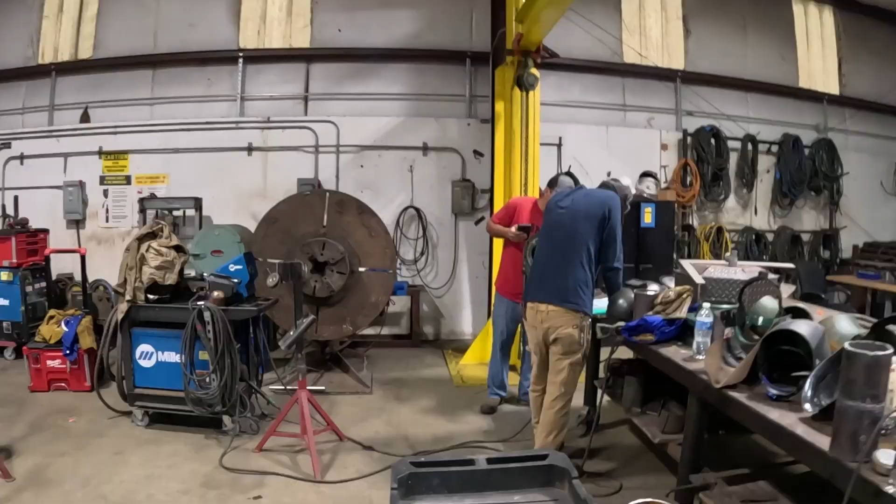These guys not doing nothing. What's up, Ricky? Yeah, we're doing another vlog, Ricky. Come on, yeah, my boy Carlos.

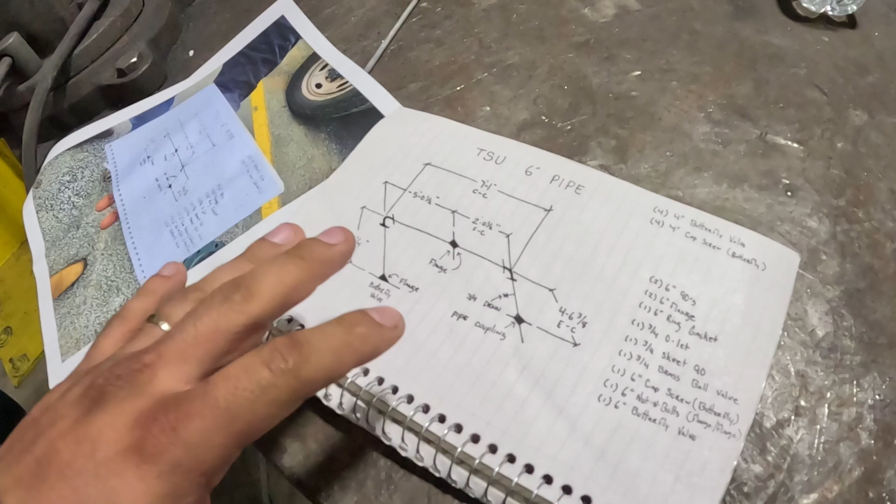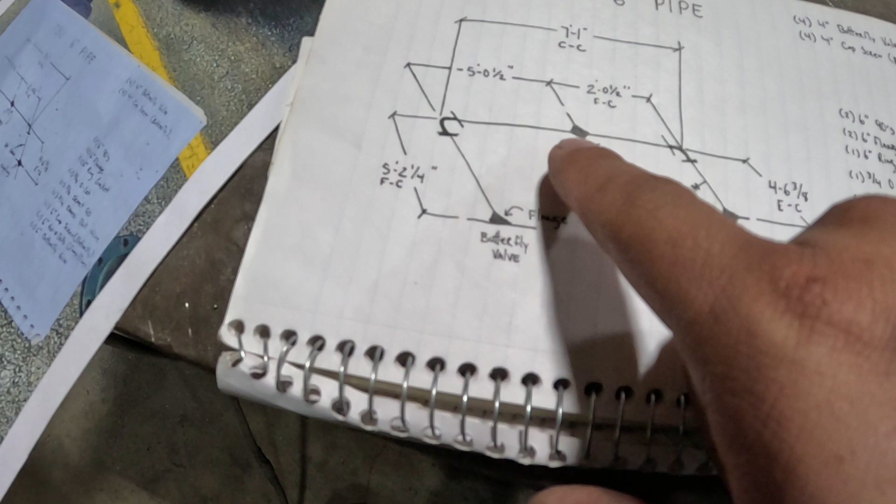This is pretty much what they sent in the email, and I have the original one here. So this is what we got to build, pretty much a loop. We already have this piece right here. Right now all we got to do is add this 90, come down, add a drain, and on this piece, which is a double flange, connect to another 90. This goes to a flange, and then it connects to the pipe we have on the job site. So it's gonna go connected here, connected here.

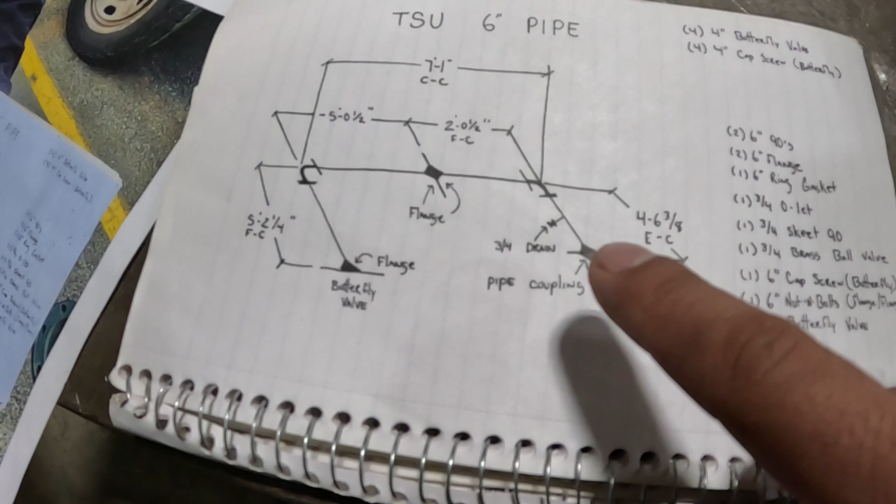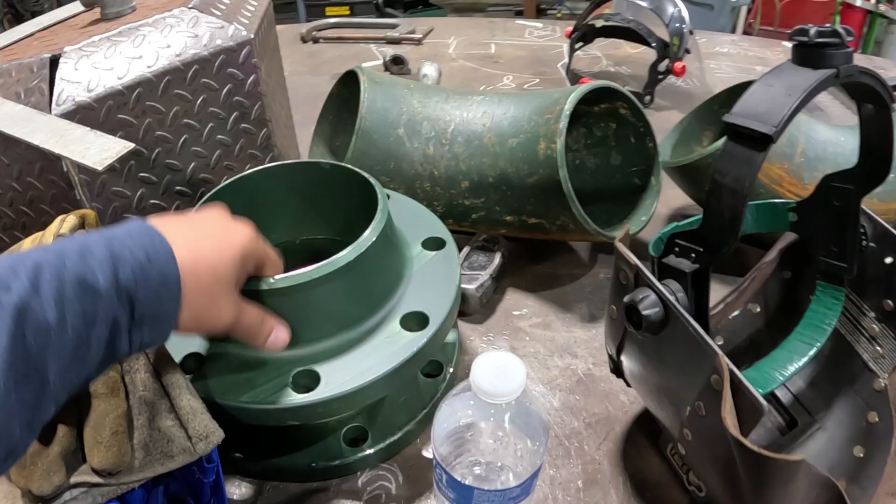So we got some of the flanges here, the flanges and the 90s. We're gonna take a quick inventory of what we have, make sure we have everything, and if we need to, we can order it while we have enough time to get everything here so this can be done today. It has to be done today, because tomorrow morning we shut the whole system down and start building this thing out.

These measurements have to be exact to the point where we're not gonna have any issues, because we're not gonna have a welder out there. In order to fix this, we would have to bring the pipe back to the shop and adjust them where we need to. So when I take these measurements, I have to make sure I have everything correct.

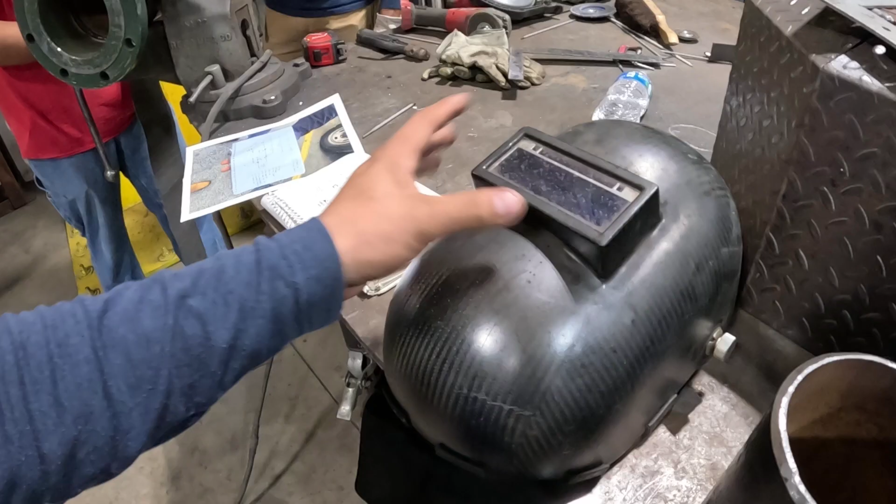What do you think about my carbon fiber hood, Ricky? It's nice, huh? Oh man, you're getting all kinds of scratches on it. I know, man, I'm putting it out there. Sucks. Look at that. It's all right.

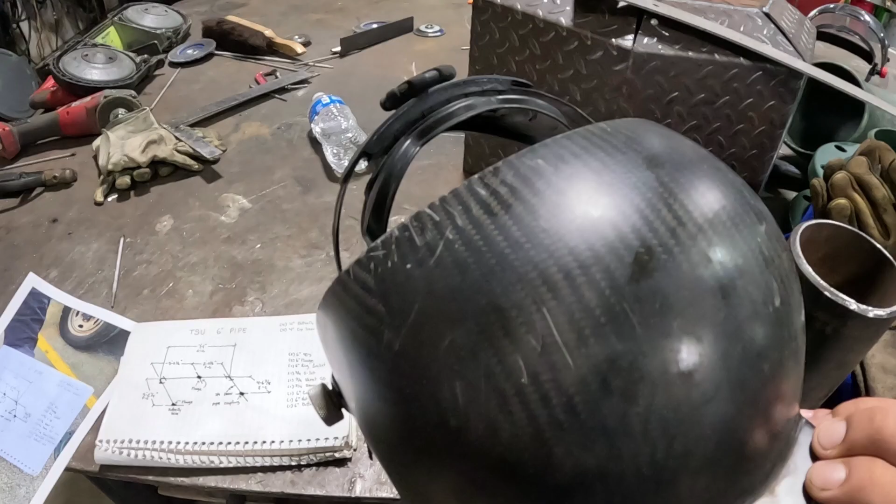Well, look who it is. What's up, man? Welcome back to the vlog. My boy Arnold. All right, what we got today, Marlon?

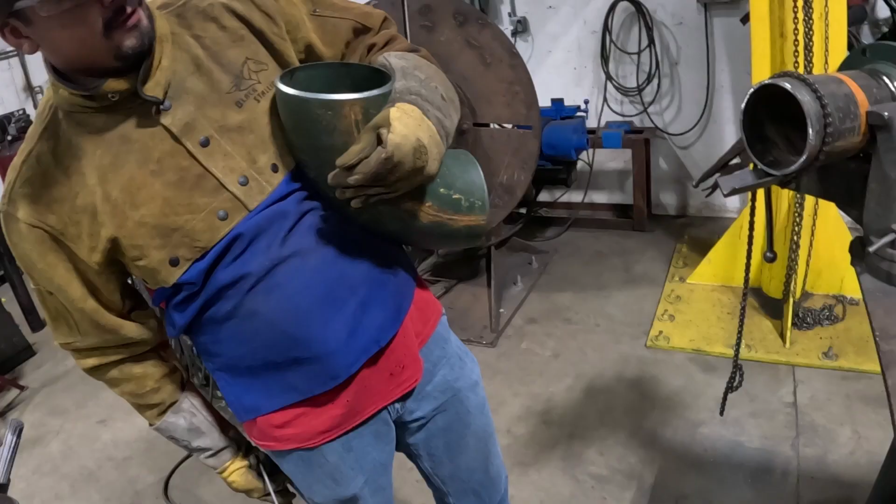Alright, over here, Ricky's being an all-you-can-be soldier, fitting it and welding it out. You want to see the level right there? It's pretty goddamn level. Oh, you got it or what? Let's see this.

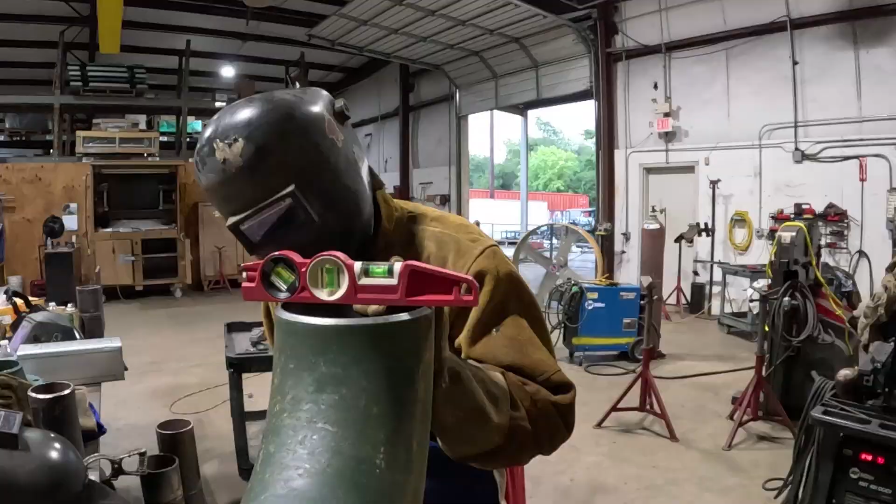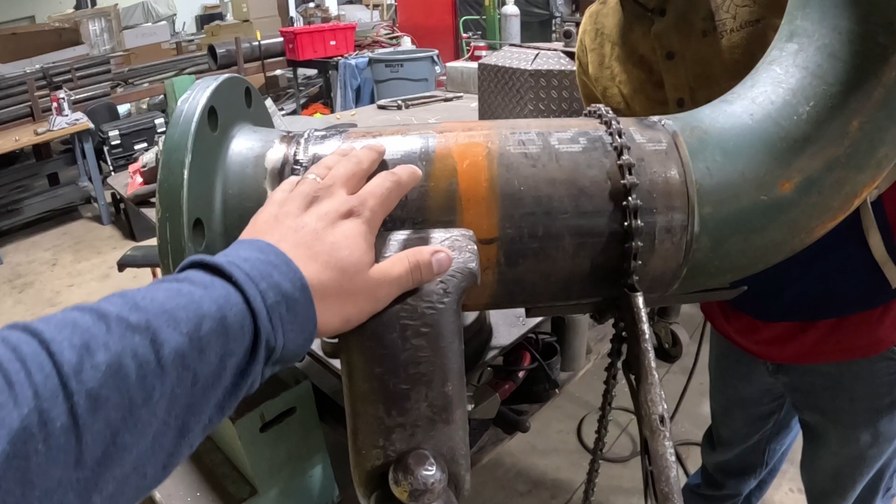It's good right there. Yeah, alright, so Ricky's building out the piece with the flange. We already had this piece made up, so we just went ahead and cut it to size. Ricky's tacking on this 90, and then we're gonna go ahead and go on.

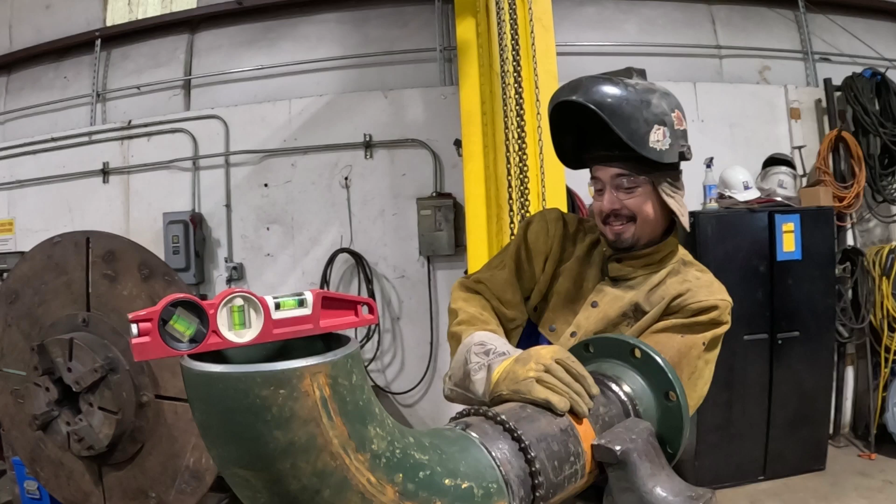I actually get a little break today because Ricky is actually taking care of the welding. I need to take care of the welding. Yeah, in the shop, of course, I take care of the welding. Yeah, he's stepped up. He stepped up. When it's hard, he wants me to do it, but when it's easy over here at the shop, that's when he wants to step up. When it's not my job. Hey, okay, well, we need you tomorrow to put this in. That ain't my job either.

Alright, so we're gonna go ahead, fit everything up, probably weld it out. Like I said, Ricky's gonna help me weld out, so I'm gonna start cutting up the other pipe.

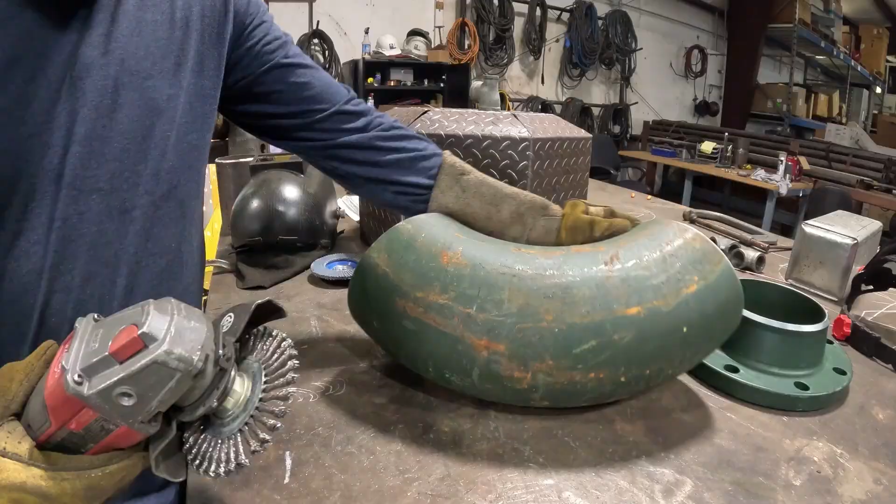Alright, so this guy's over here bragging. This is how you run 7018. Let's check it out.

Okay, let me put some light on it, that way the camera can really pick it up. It's not bad, it's not bad. You've been seeing what I'm doing, huh? Yeah, you've been seeing my technique, huh? I've been saying what not to do.

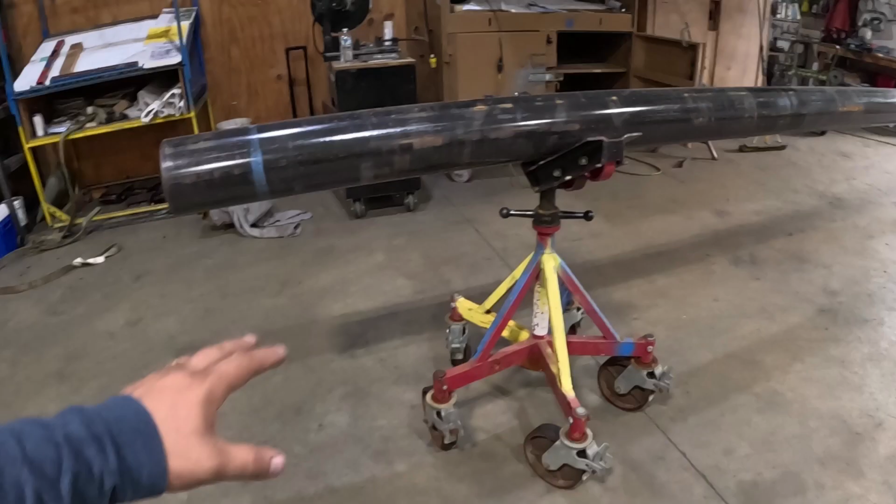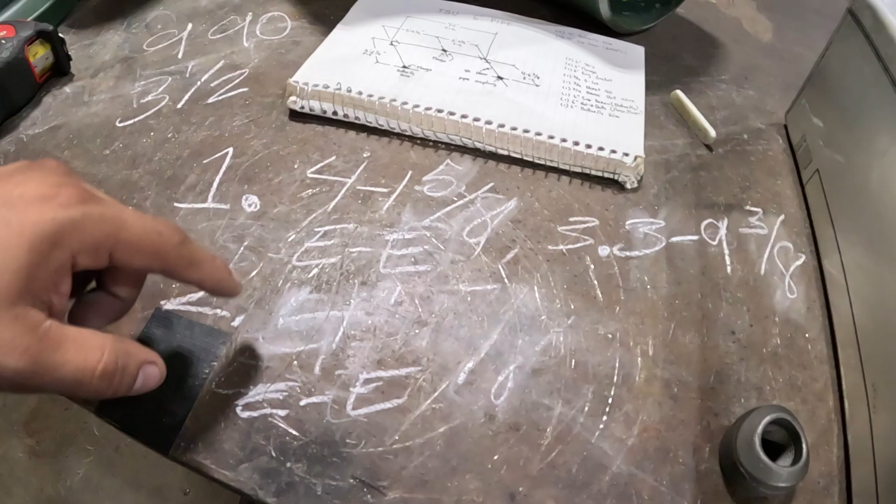Alright, so we finally got the pipe in, guys. So now we're pretty much gonna take our measurements that we have over here. This is our end-to-end pieces, so we still gotta do the takeoff here, which we already did, got them numbered. So we're gonna take these measurements, go ahead and transfer them to this pipe, get this pipe cut to the lengths that we needed. So yeah, let's go ahead and get this pipe cut.

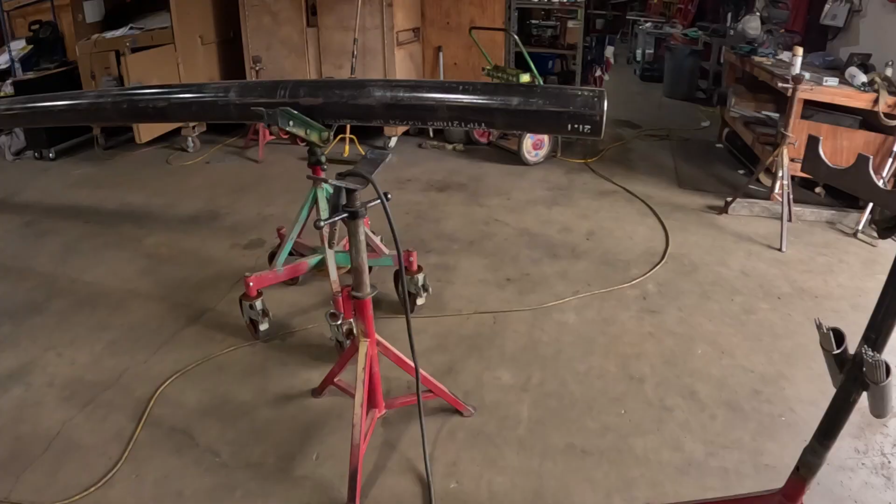That way we can go ahead and start putting it together. A few moments later. Alright, so instead of cutting it, we're gonna go ahead and weld the flanges on the ends of the pipe. So Ricky's gonna go ahead and tack this one up, weld it out, and then we're gonna put another flange on here, tack it up, get it welded out. That way we have pretty much a stand kind of - we're using this whole pipe as a stand. Then once we got those welded out, we'll go ahead and cut it to what we need to. So let's go ahead and fit up the flange, weld it out so we can keep going.

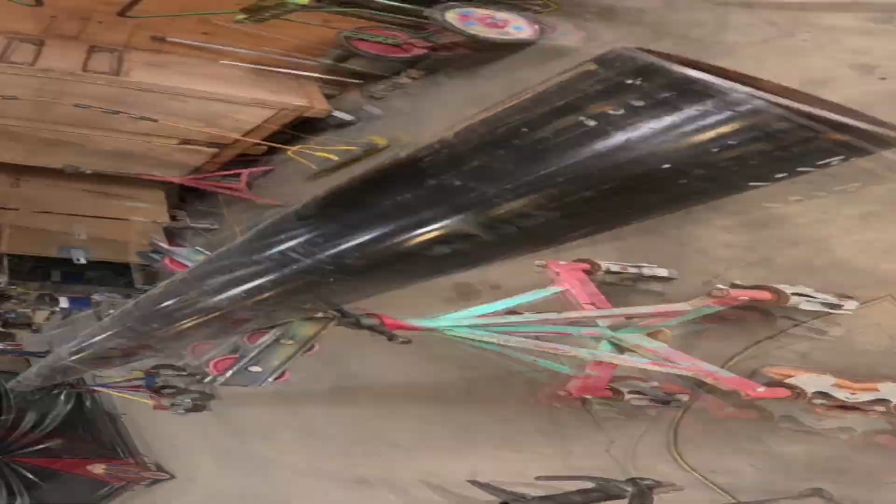Alright, so I just fit up my boy Ricky right here with the flange. He's gonna go ahead and weld that out. Once he gets done with that, we're gonna put another flange over here. He'll go ahead and weld this one out. Once he gets both of those done, we're gonna go ahead and take our measurement, cut it, and then go ahead and start putting our pieces together.

So we're rolling now. Finally that pipe got here, we're able to get some stuff done now. So let's get it.

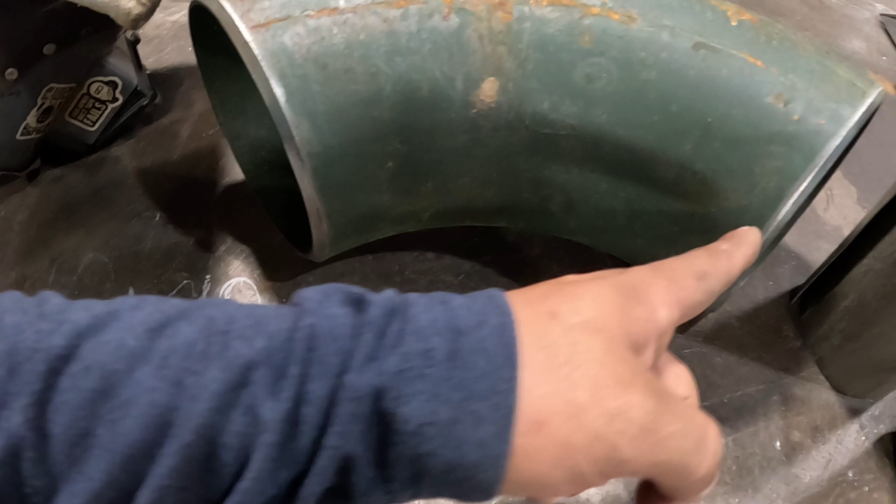Alright guys, so now that flange is welded up, now I gotta go over here to my drawing, and pretty much all these measurements are from the face of this flange, which, like I said, that's a flange, the face of that flange to the center of that 90, which it's right here. But we need to get the measurement to here so we can know exactly what size pipe we need to cut. So what I gotta figure out is find out my takeoff. On a 6-inch 90, it's 9 inches. So from here to here is 9 inches.

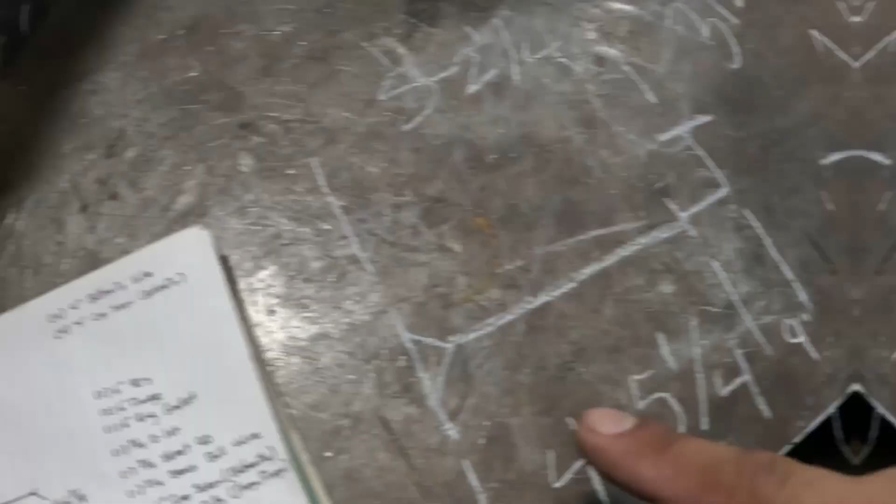Alright, so y'all can better understand me, I pretty much drew out the flange with a piece of pipe in between and then the 90. So my whole total is 5 foot 2 and a quarter from the face of the flange to the center of the 90. So I need to find out what this measurement's gonna be.

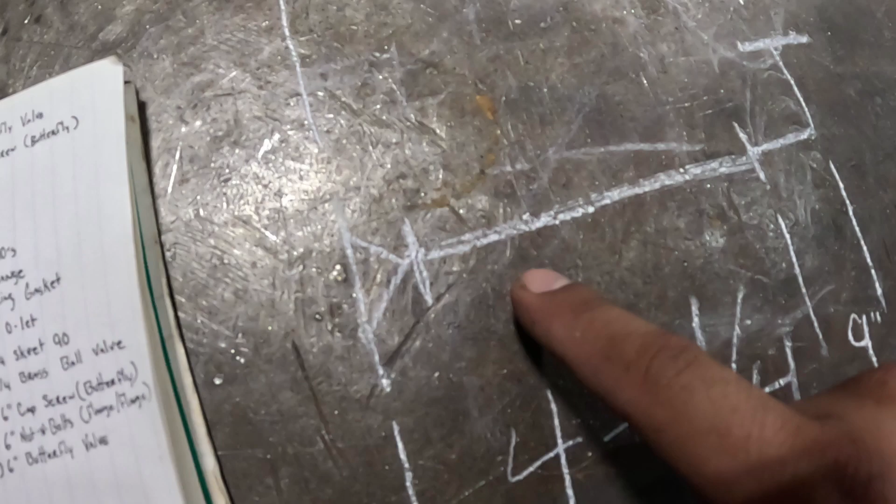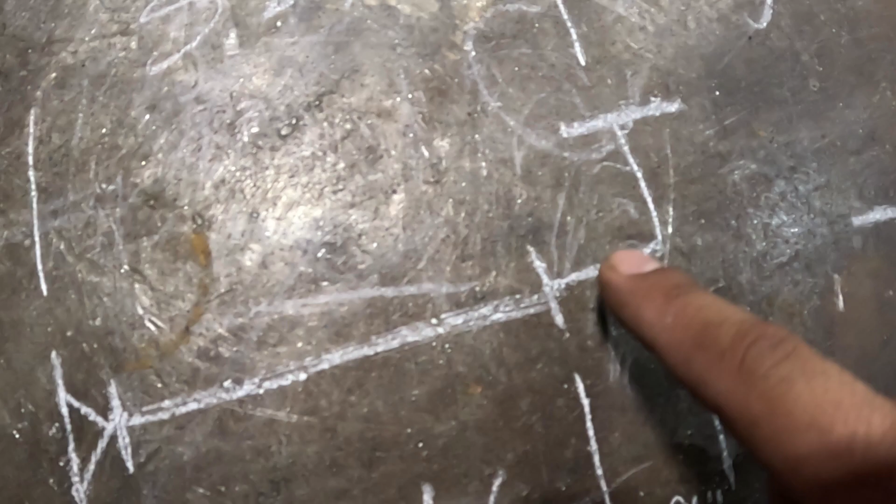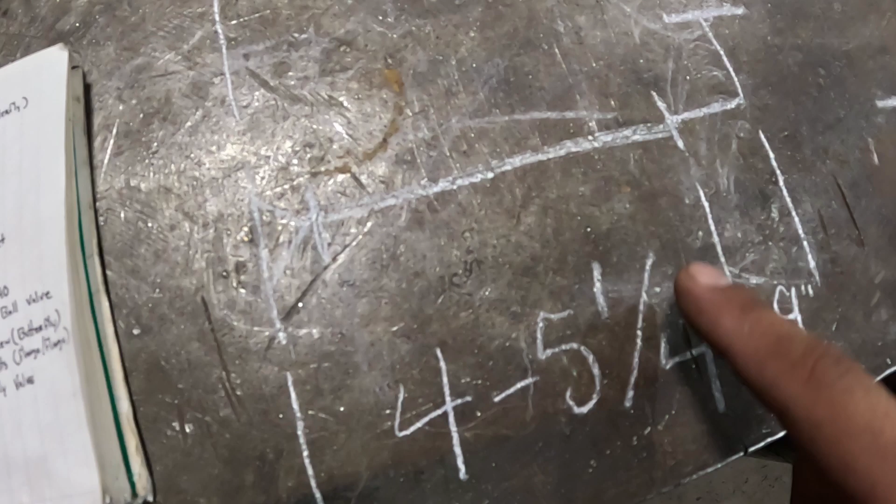But because Ricky already welded the flange on the piece of pipe, now I pretty much have to take off my 90, which my 90 from my edge to center is 9 inches. So that gives me 4 foot 5 and a quarter. So I have to measure from the face to the edge of my pipe. That's gonna be my cut piece. So my cut piece is gonna be 4 foot 5 and a quarter.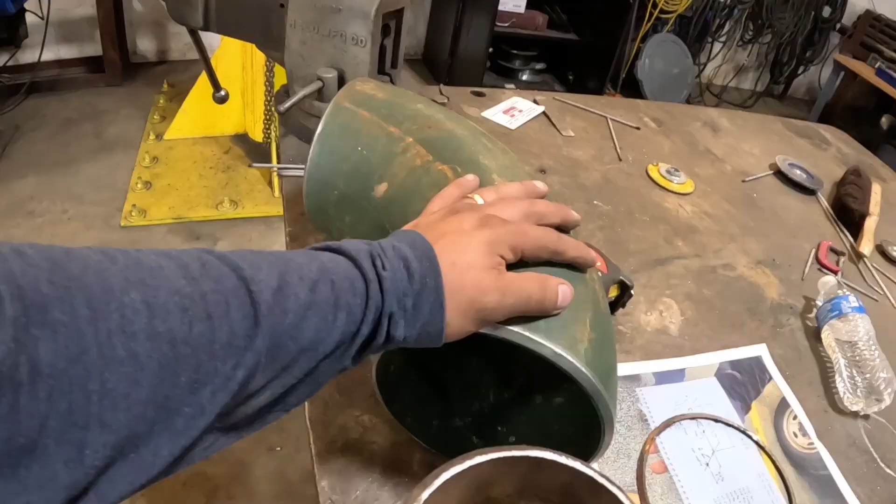All right, so we got that piece cut to the measurement we needed. Now we're gonna get it ready to fit up so we can throw on our 90. We're gonna put this up, weld it out, and then make the next piece. While he's welding that up, I'm gonna start cutting this piece and this piece also, just so we can get this going, guys, because this pipe came in super late and we gotta finish it today.

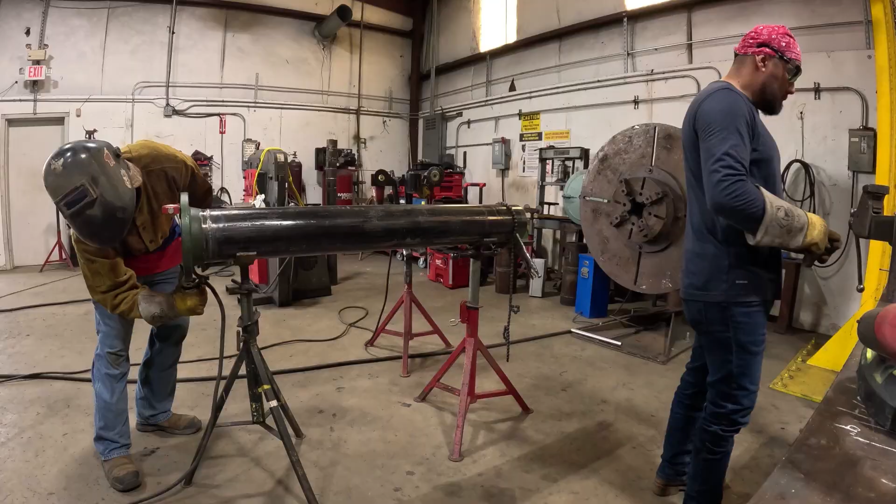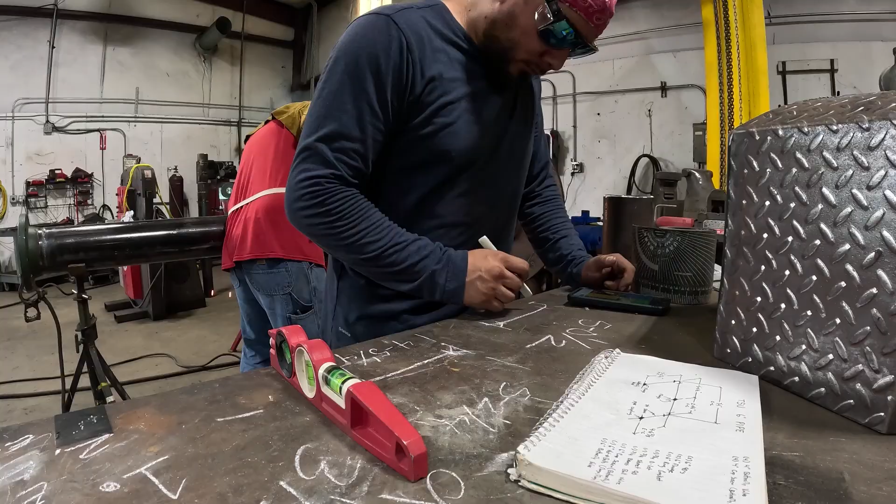All right guys, so Ricky got that one welded out. I got this one cut. I got this one marked. So once we get back from lunch, we're gonna go ahead and get these done.

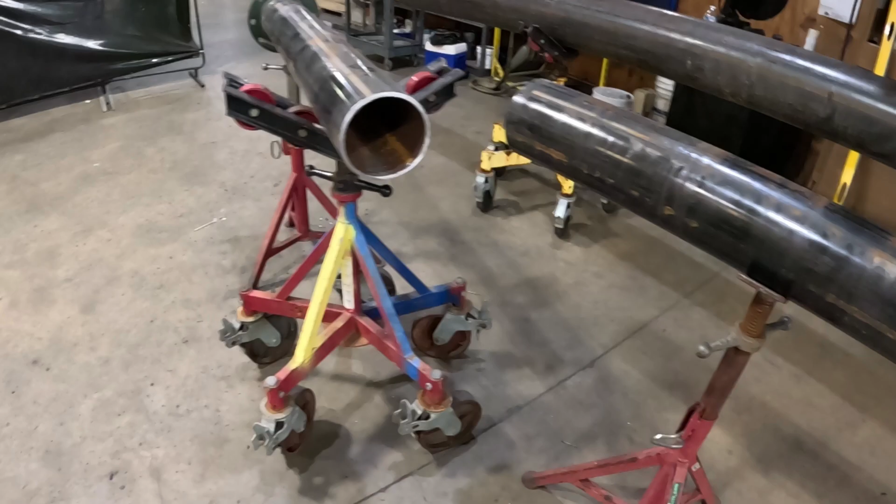Yeah, let's go get something to eat right now. But yeah, it's going pretty good. I have a good feeling we'll get this knocked out. I need to get this knocked out no matter what. So right now, let's go get something to eat, refuel, and we'll come back and hit it strong.

One hour later. What you doing? You ready? Ready to get back on it? This one's done? Yep. All right, I got that other piece. Actually, that one can go on here now.

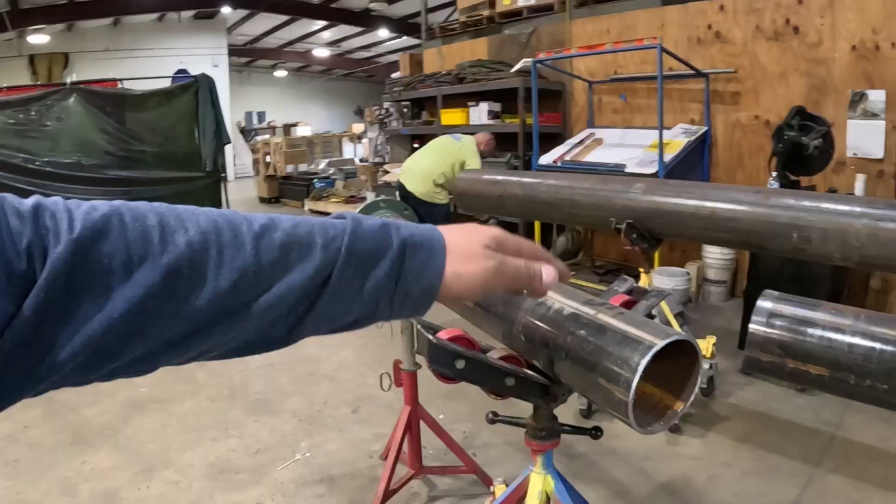All right, so we just got a bite to eat. I got some Chick-fil-A. Now we gotta get back on this so we can hurry up and finish it. Go ahead and put this piece to that other one, and then I gotta still cut this one.

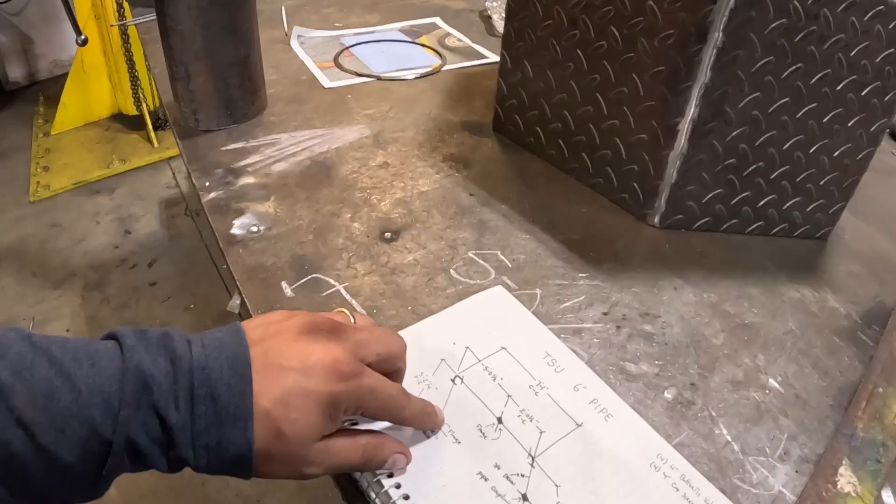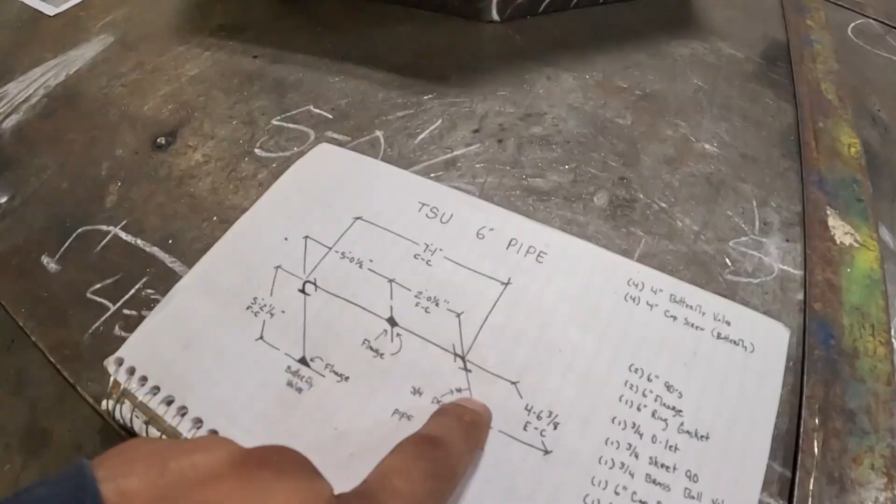So, all right, we got this piece fitted up. This piece is pretty much ready to go. Ricky's gonna finish welding it out. That'll be this piece right here, this one right here. And that one is this one right here, which we already have 90'd. I already have this one cut. So we just need to put it onto that one and then add our 3/4 O-let on there for our drain.

And then that's it, we're done. So it's going pretty good. About 1 o'clock, we get out of here at 3. So I think we should be able to knock it out.

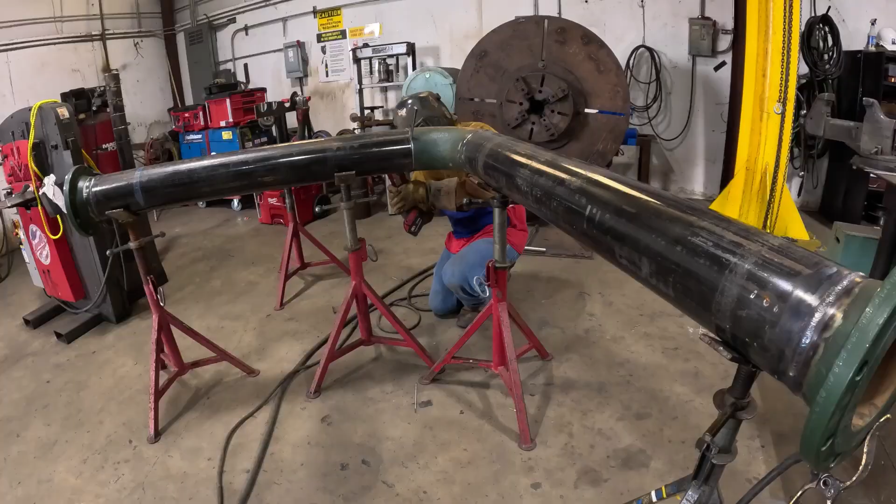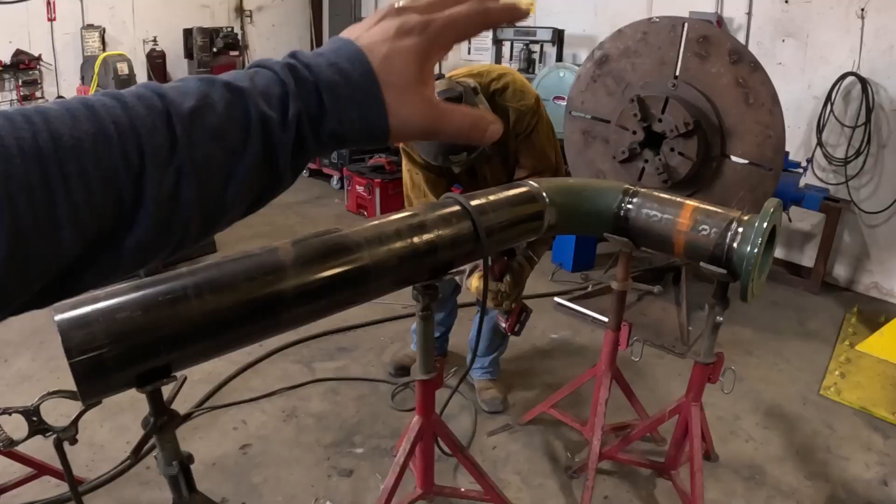Alright, so we got the last piece tacked up, ready to go. Ricky's gonna weld that one out. We got the other one here. So this one's pretty much ready to go, it's a little warm still. So on this one, all we have to do is add this 3/4 OLET.

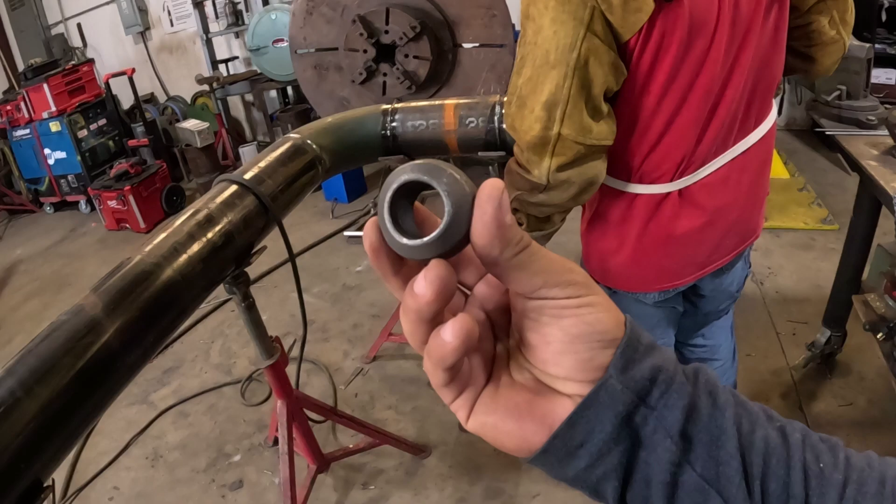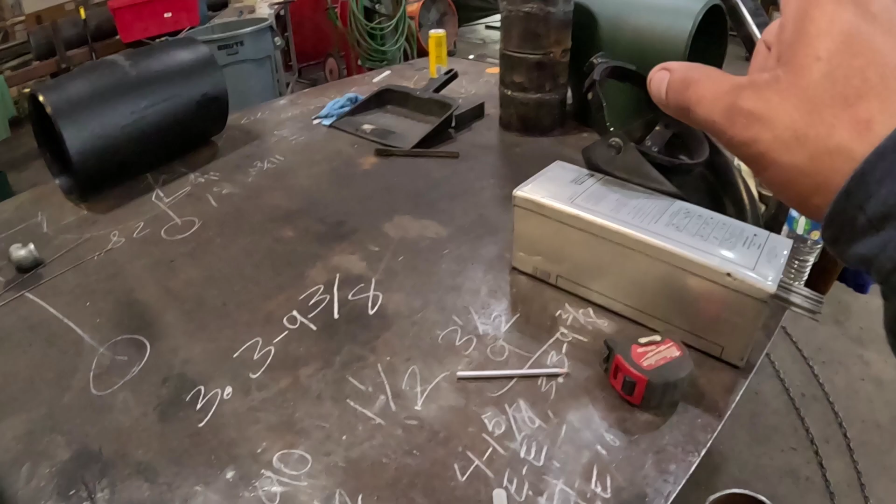So this 3/4 OLET has to go on this side at a 45. This is gonna be our drain now. So pretty much that will be all set up. Like I said, this piece is that one, and then this piece is this one right here. So we're pretty much gonna have everything done. This should be ready to go for tomorrow's shutdown.

I won't be there, it's actually my son's birthday weekend. We're gonna be celebrating, so happy birthday to my son Julian. But yeah guys, we're gonna be finishing up here and getting this thing ready to go.

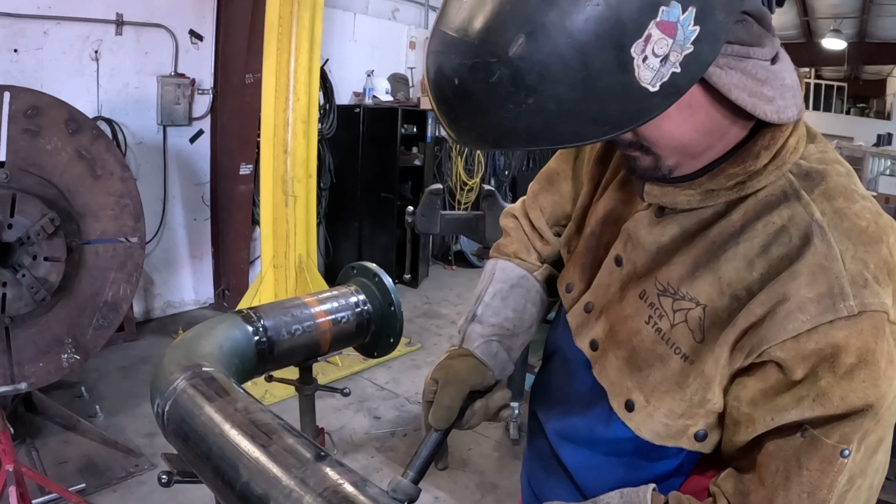We got it all tacked up, ready to go. You ready, Ricky? Last weld. I'm going home, I wanna go home. And you're going home. Alright, so this is the last weld.

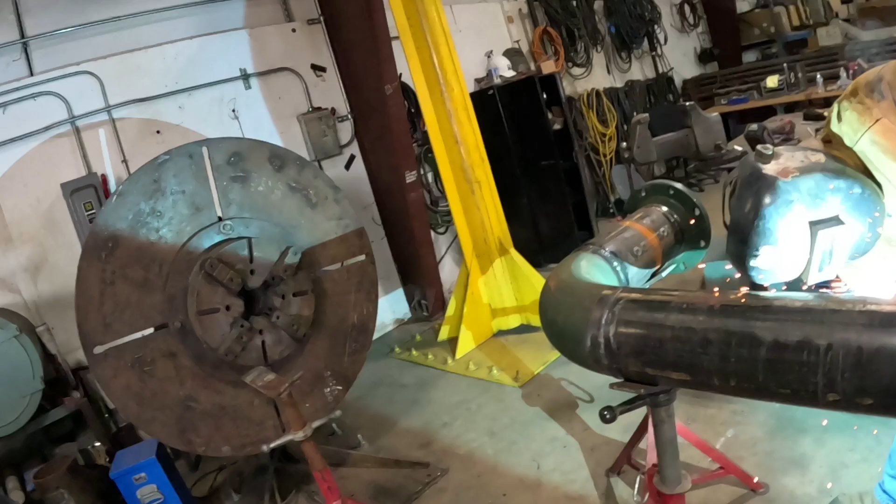Everything is going to be ready to go today. They're actually on the way to come pick this up and get ready for tomorrow. Everything here is good to go. If I mess up, I'll hear about it on Monday, or maybe I'll get a phone call Saturday. Surprise, motherfucker! Boy, Ricky though, finishing that last weld. Let's get it.

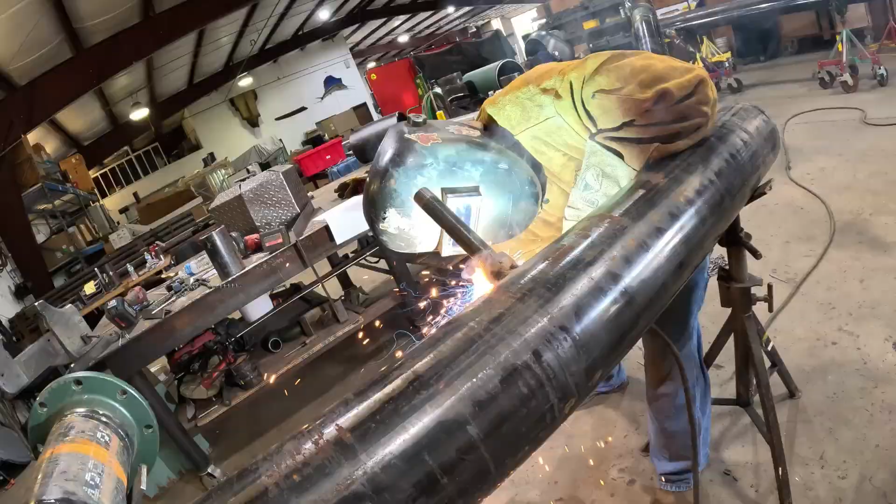Well, that's it guys, we went ahead and knocked everything out. Got it loaded up on the truck, ready to deliver early in the morning. So hopefully everything goes good, guys.

That's just a little thing I do here at the shop. Luckily, I didn't have to weld today, I was actually just a fitter, and my boy Ricky went ahead and took over the welding. Anytime I can get a break from welding, or I don't have to weld, that's fine with me, guys. So my boy Ricky took care of it. He's an awesome welder, so is Arnold. Arnold's our other welder, and then myself.

I was extremely happy we got all that done. I was supposed to be there, but usually when it's my kid's birthday, we celebrate with them the whole weekend. And yeah, this is my son's weekend we're celebrating, so we're gonna be celebrating with him this weekend. I'll make sure everything went good over the weekend. On Monday morning, we'll see what's in tune next week, what we get into.

Maybe I can bring you along. And yeah, that's it, that's gonna be it for now.